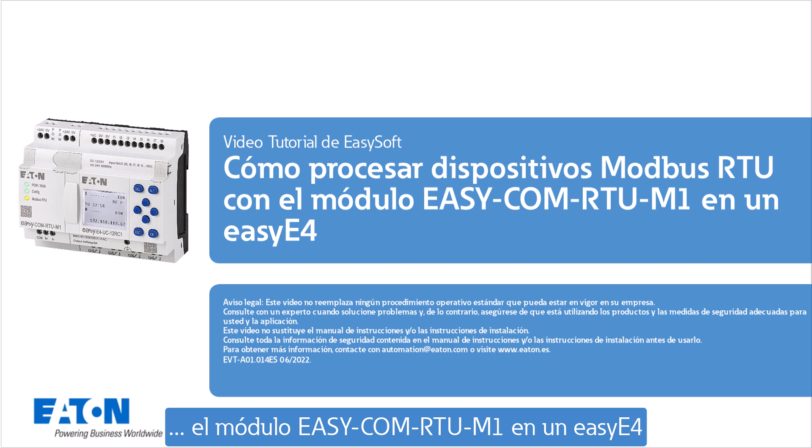Welcome to the tutorial how to process Modbus RTU devices with the EASY-COM-RTU-M1 module on an easyE4. In this example, a PowerXL DG1 frequency inverter is connected serially to the EASY-COM-RTU-M1 module.

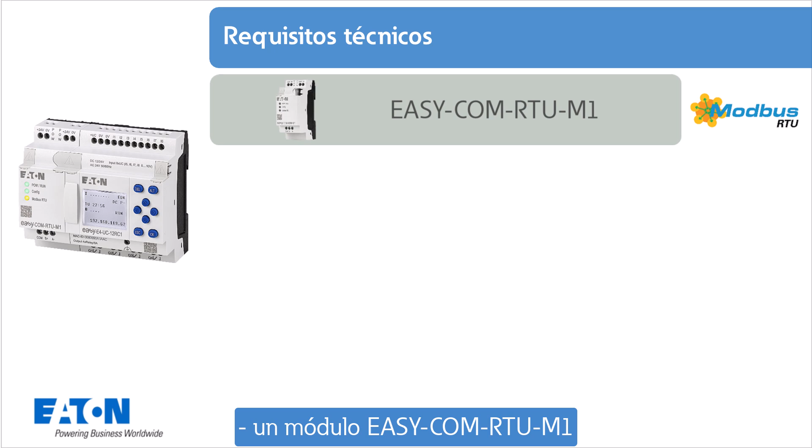The following technical requirements must be met for this: an EASY-COM-RTU-M1 module, an easyE4 basic device with firmware version greater than or equal to 1.4, including a bus connector for communication modules on the left side. A note: the bus connection plug is included in the scope of delivery of the Modbus module. The EasySoft programming software greater than or equal to version 7.4. A license is required for the EasySoft programming software.

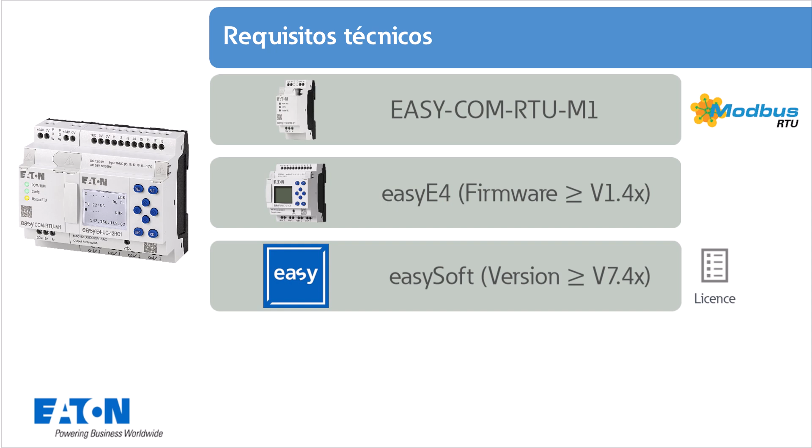Software, firmware and updates can be downloaded from www.eaton.com/software. The exemplary used PowerXL frequency inverter DG1.

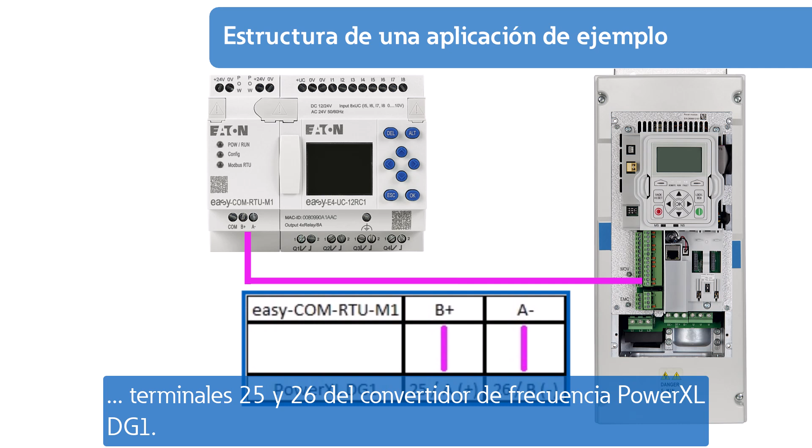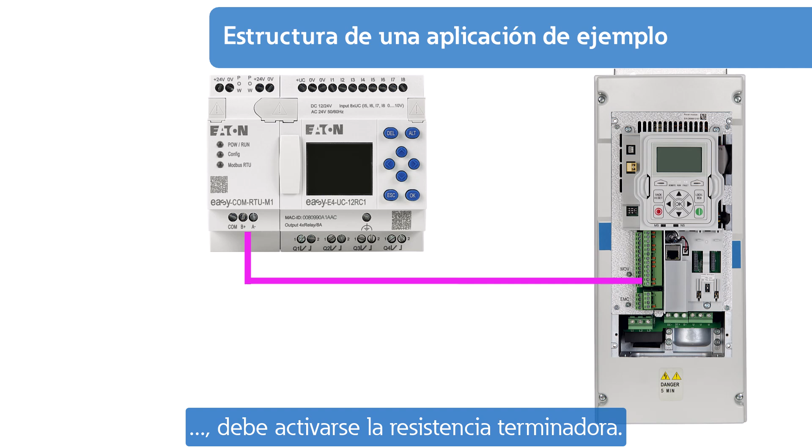What does the structure of the exemplary application look like now? The EASY-COM-RTU-M1 module is connected to the terminals 25 and 26 of the PowerXL frequency inverter DG1. If the DG1 is the last device on the Modbus network, the terminating resistor must be switched on. With the easyE4, the terminating resistor is switched on by software.

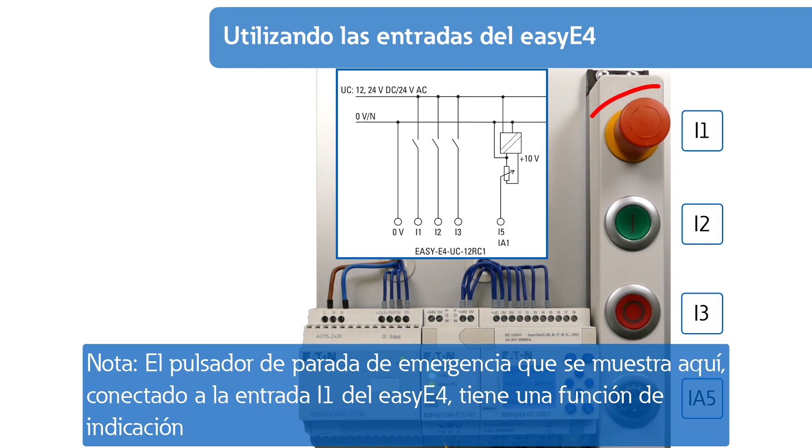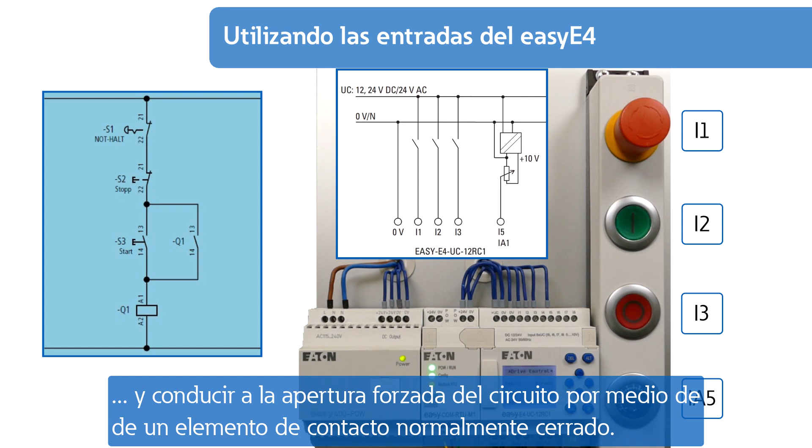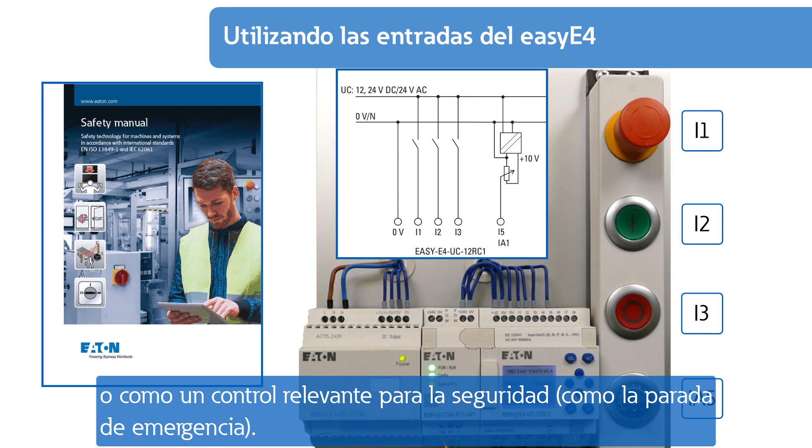A note: the emergency stop switch shown here connected to input I1 of the easyE4 has an indicating function and no safety relevant function. For safety relevant functions, emergency stop switches must operate according to the principle of forced actuation and lead to forced opening of the circuit by means of a normal closed contact element. The easyE4 must not be used to implement safety relevant functions in the sense of personal and machine protection or as a safety relevant control, such as emergency stop. More detailed instructions are given in the Eaton safety manual.

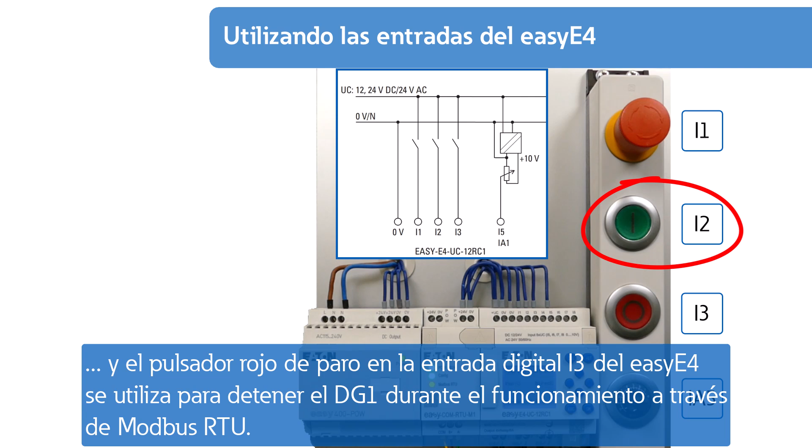In this application example, the green on button on digital input I2 of the easyE4 is used to start the DG1, and the red off button on digital input I3 of the easyE4 is used to stop the DG1 during operation via Modbus RTU. On the PowerXL DG1 variable frequency drive, both analog inputs are assigned to potentiometers. The analog moving coil measuring instrument is connected to analog output 1 and displays the actual output frequency of the DG1.

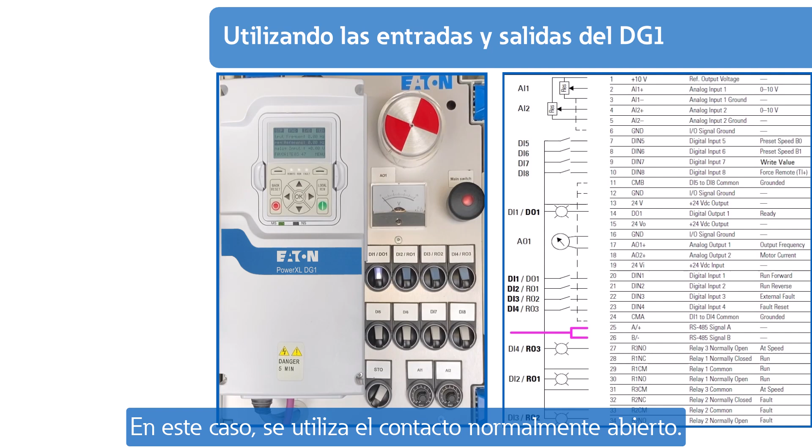The switching elements of the upper row have a double function. On the one hand, they contain the on switches for the digital inputs DI1 to DI4, shown in bold in the circuit diagram. On the other hand, the indicators for the digital output DO1 and the relays RO1, RO2 and RO3. Here the normally open contact is used in each case. The second row contains the on switches for the digital inputs DI5 to DI8. All 8 on switches have a push button function to the left and a latching function to the right.

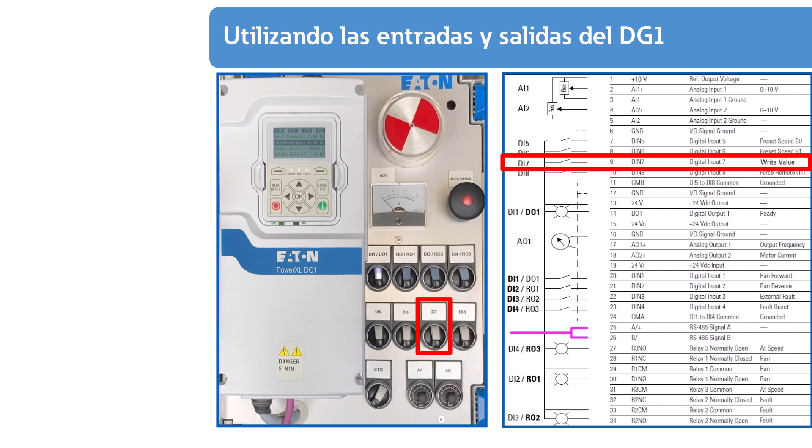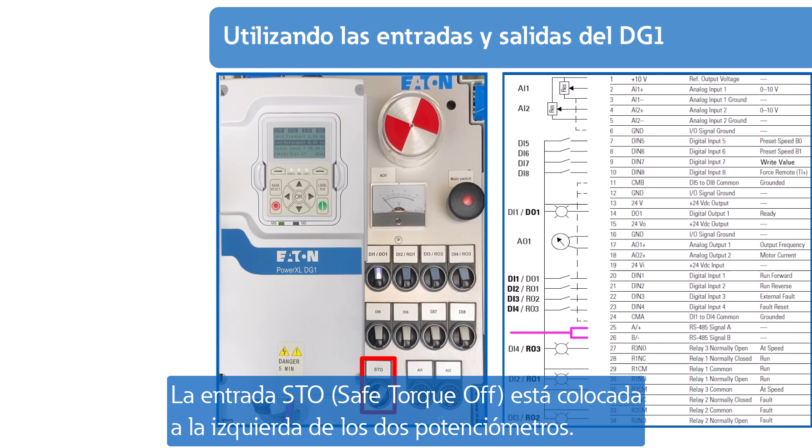Digital input DI7 is not assigned with any function by factory default. In this application example, the status of the digital input is read in via Modbus RTU and used to write an acyclic value. The STO, safe torque off input, is positioned to the left of the 2 potentiometers. In the left position of the switch, the DG1 would coast directly and output the error message safe torque off on the keypad.

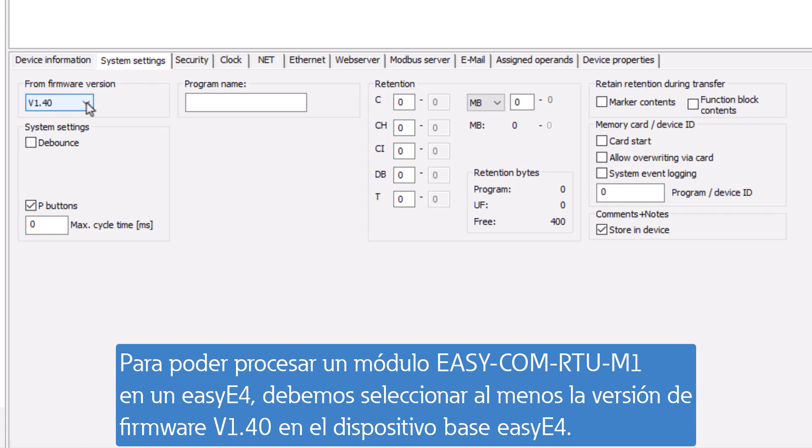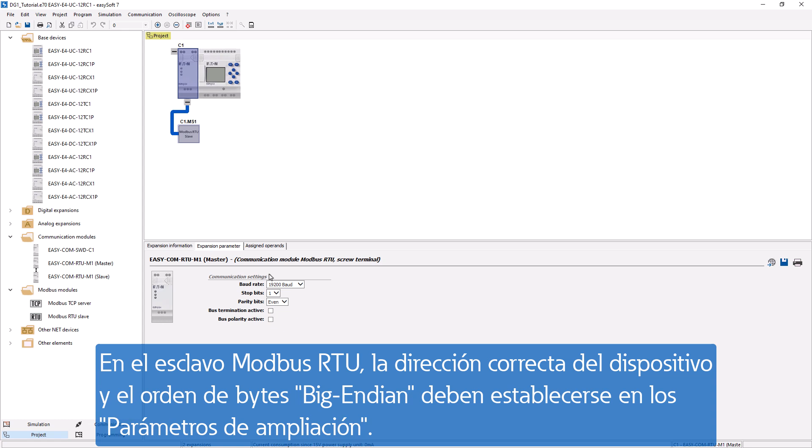To be able to process an EASY-COM-RTU-M1 module on an easyE4, at least firmware version 1.4 must be selected on the easyE4 basic device. In the expansion parameter tab of the Modbus master, the same communication settings must be made for the baud rate, the stop bits and the parity bit as for the connected devices. At the Modbus RTU slave, the correct device address and the byte order big endian have to be set at the expansion parameters.

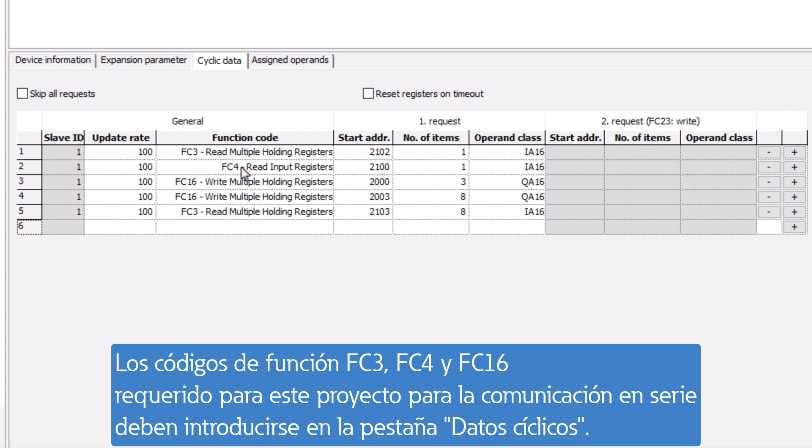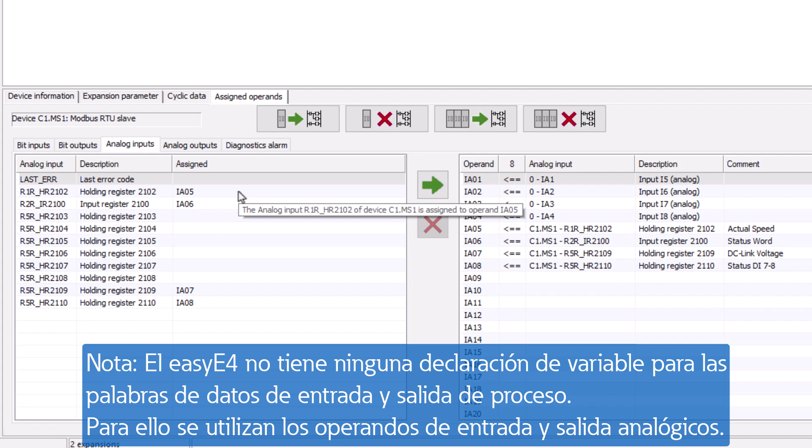The function codes FC3, FC4 and FC16 required for this project for serial communication are to be entered in the cyclic data tab. In the tab Assigned operands, the Modbus registers operands are assigned. A note: the easyE4 has no variable declaration for the process input and process output data words. The analog input and output operands are used for this.

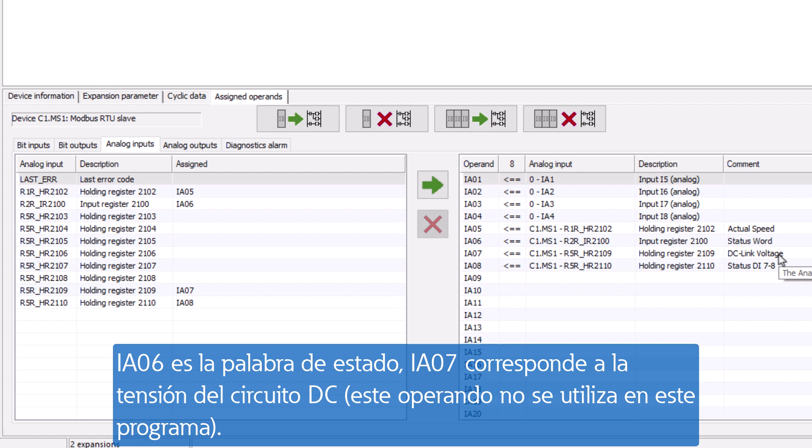As an example, in the analog input subregister, register 2102 is assigned to operand IA05, which corresponds to the actual speed of the connected drive. IA06 is the status word. IA07 corresponds to the DC link voltage. This operand is not used in this program. IA08 is used to read the status of digital inputs DI7 and DI8.

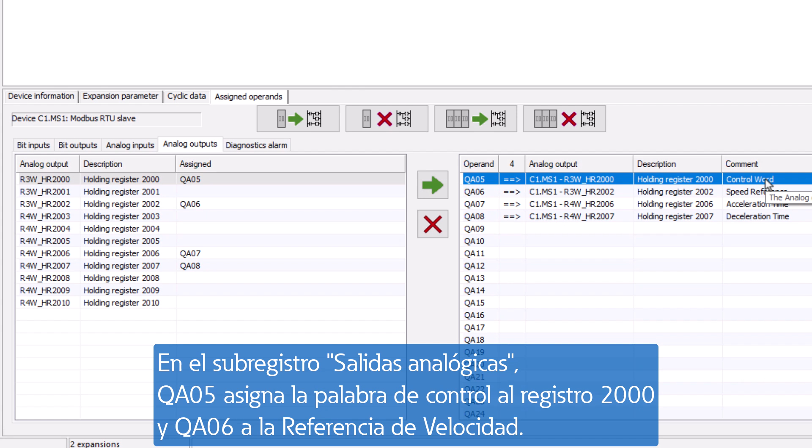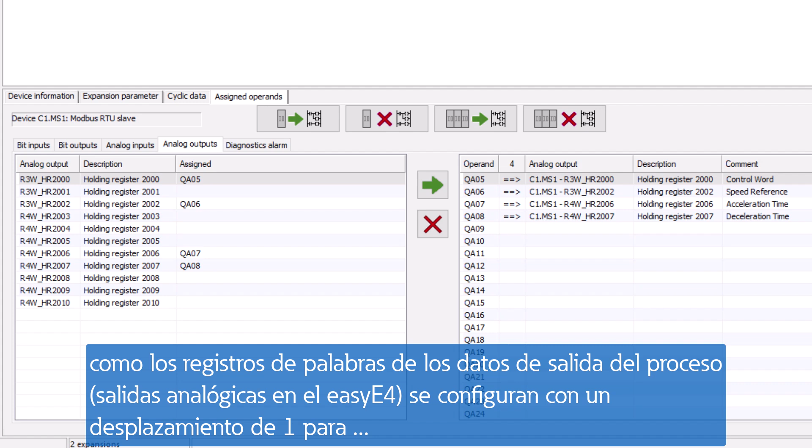In the analog output subregister, QA05 assigns the control word to register 2000 and QA06 to the speed reference. Register 2006 and 2007 are not used in this project. A note: both the process input data word registers, analog inputs on the easyE4, and the process output data word registers, analog outputs on the easyE4, are set with an offset of 1 for communication between the easyE4 and the DG1 frequency inverter. For example, the control word in the easyE4 is register 2000. In the DG1 it is register 2001.

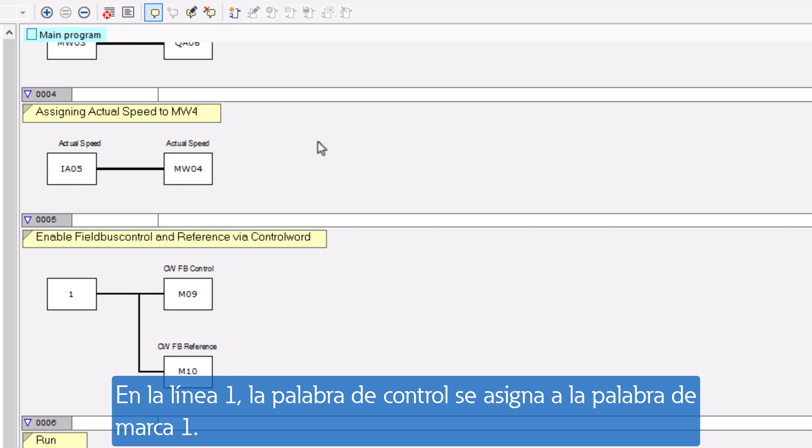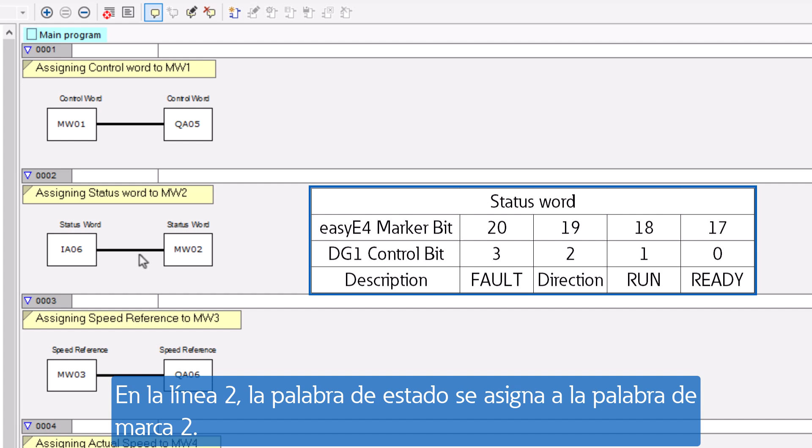The program of the easyE4 is explained below. In network 1, the control word is assigned to marker word 1. In network 2, the status word is assigned to marker word 2. In network 3, the speed reference is assigned to marker word 3. In network 4, the actual speed is assigned to marker word 4.

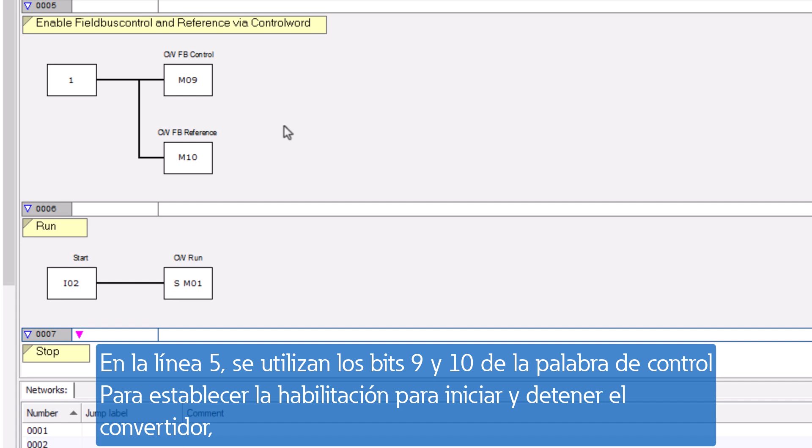In network 5, bits 9 and 10 in the control word are used to set the enable for starting and stopping the drive, as well as the setpoint setting via fieldbus. In network 6, marker bit 01 is set for the start via digital hardware input 2, which corresponds to the first bit of the control word.

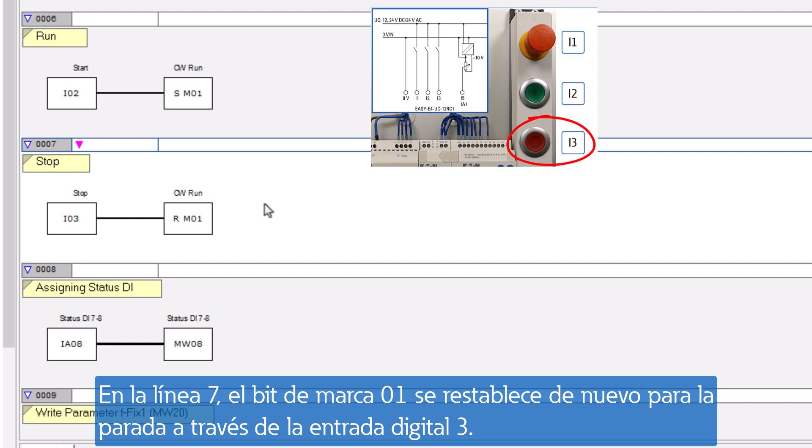In network 7, marker bit 01 is reset again for the stop via digital hardware input 3. In network 8, the status of digital inputs DI7 and DI8 is read from the drive and assigned to marker word 08.

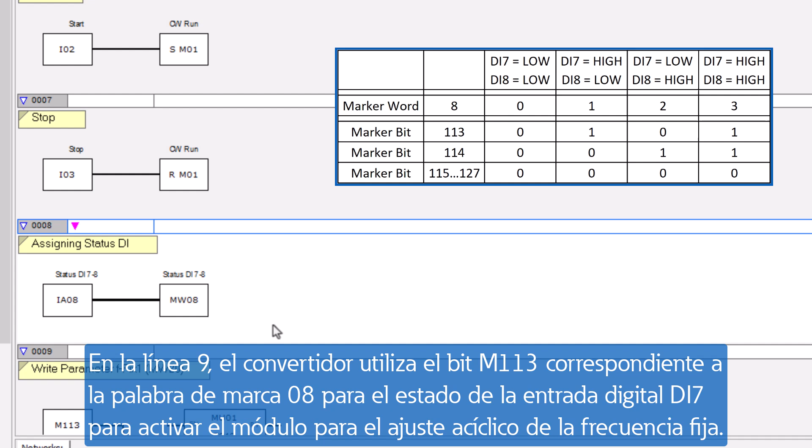In network 9, the corresponding bit marker 113 from marker word 08 for the status of digital input DI7 is used by the drive to trigger the module for an acyclic setting of the fixed frequency.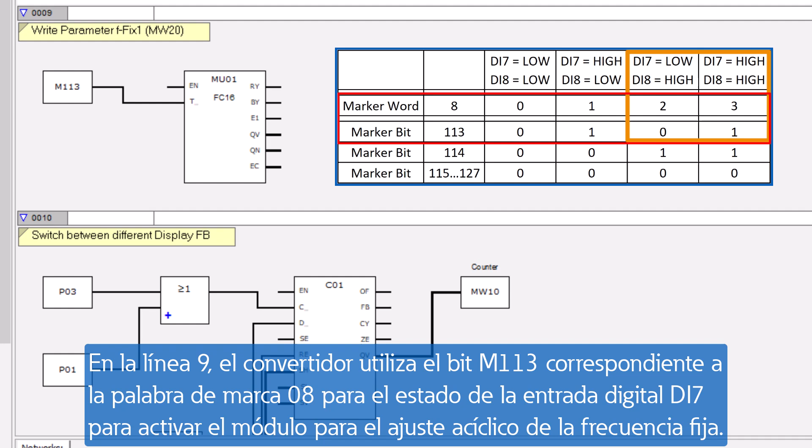In network 10, the display change between the different display modules is triggered via the right and left key P03 and P01, and temporarily stored in marker word 10.

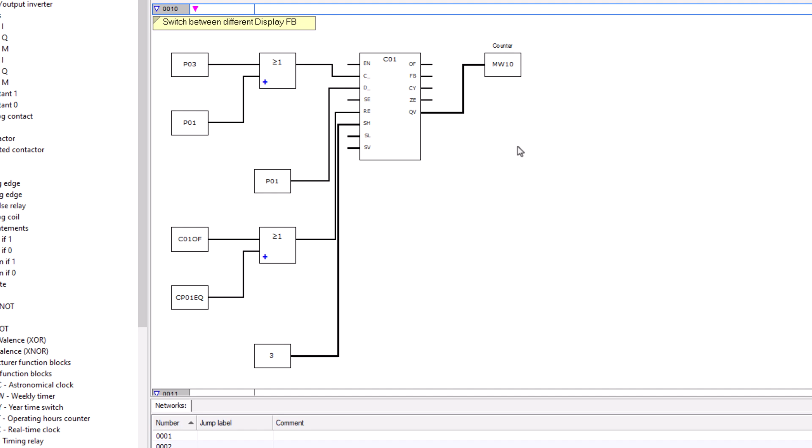In network 11, counter C01 from network 10 is reset to 0 when 65,535 is reached in marker word 10.

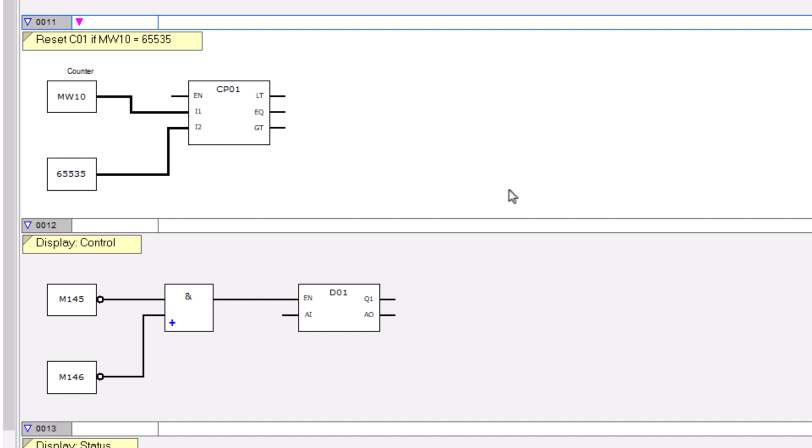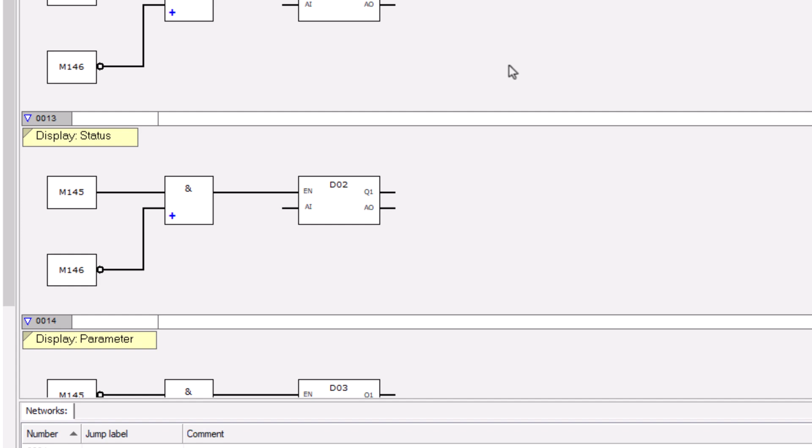In the following networks, the marker bits 145 and 146 from marker word 10 are evaluated. If marker bits 145 and 146 are false in network 12, the text display 01 is selected. If only marker 145 is true, the text display 02 is selected in network 13. If only marker 146 is true, the text display 03 is selected in network 14.

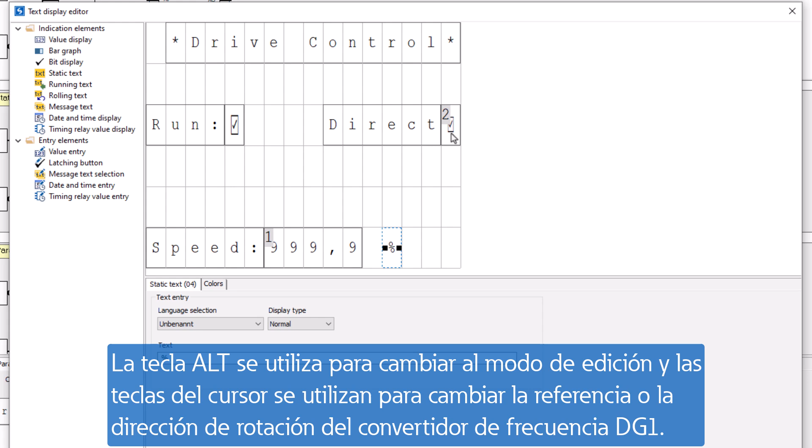The control word is displayed in text display 01. The Alt key is used to switch to input mode, and the cursor keys are used to change the reference or the direction of rotation of the DG1 frequency inverter. On the left, the DG1 is started and stopped via the run bit from the control word.

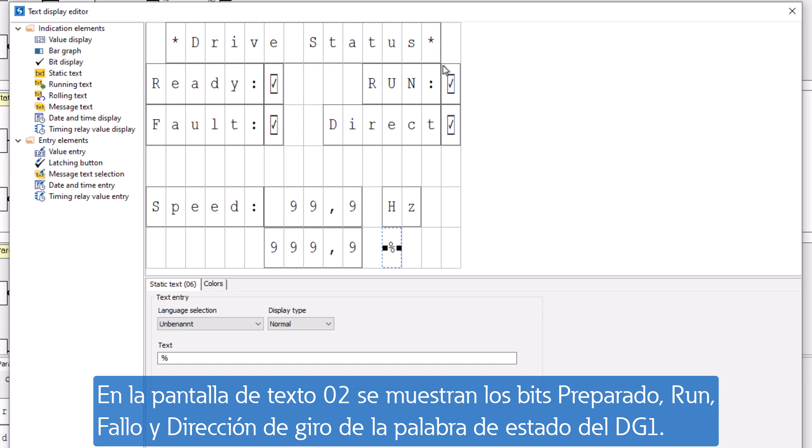In text display 02, the ready, run, fault and direction bits are displayed from the status word of the DG1. Below this, the actual output frequency is displayed in percentage and scaled in hertz.

In text display 03, the fixed frequency 1 scaled to hertz is entered via acyclic communication. This value is then written from digital input DI7 of the DG1 frequency inverter via rising edge of the read-in status.

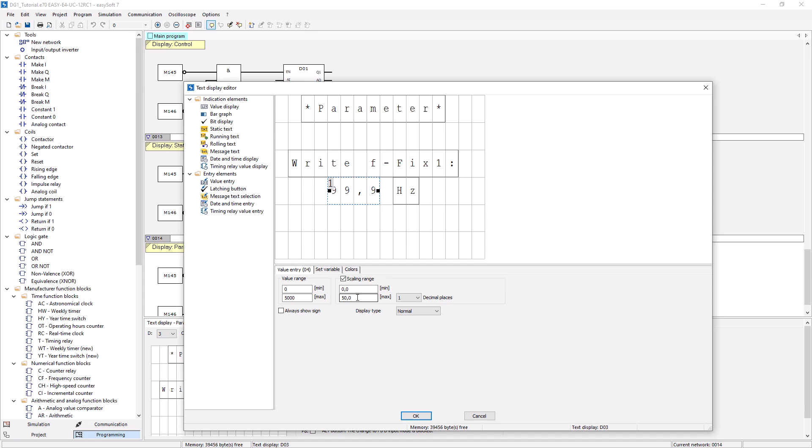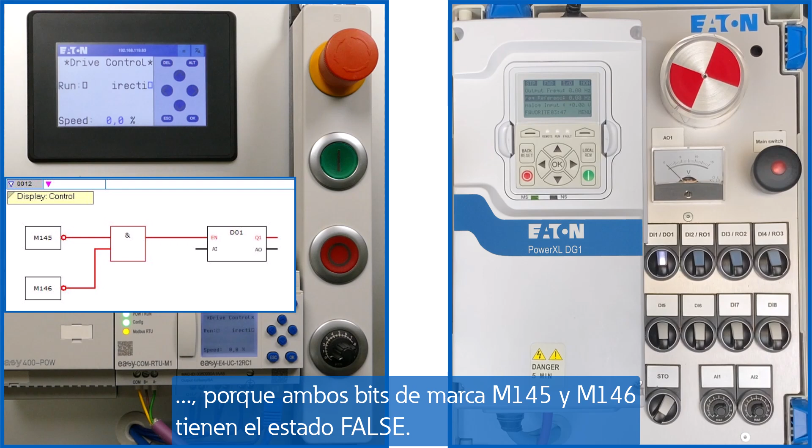Let's move on to the demonstration of the application example. On the external remote touch display EasyRTD, the text display 01 for the control word is displayed because both marker bits 145 and 146 have the state false.

On the DG1 frequency inverter, the sources for local and remote mode have been changed. In local mode, the terminal was selected as the command source instead of the keypad, and analog input AI1 was selected as the reference in order to be able to control the DG1 detached from field bus operation for maintenance work, for example. In remote mode, the field bus is the source for the control commands and for the reference.

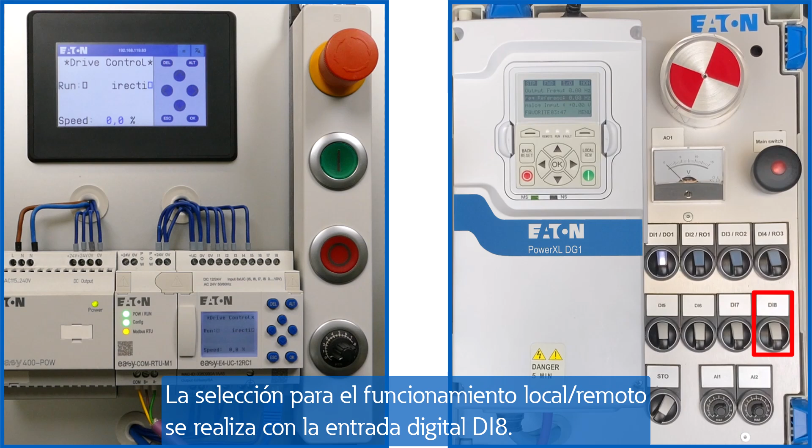The selection for local/remote operation is made with the digital input DI8. For operation of the DG1 frequency inverter via the serial Modbus RTU interface via terminal 25/26, the digital input DI8 is switched on.

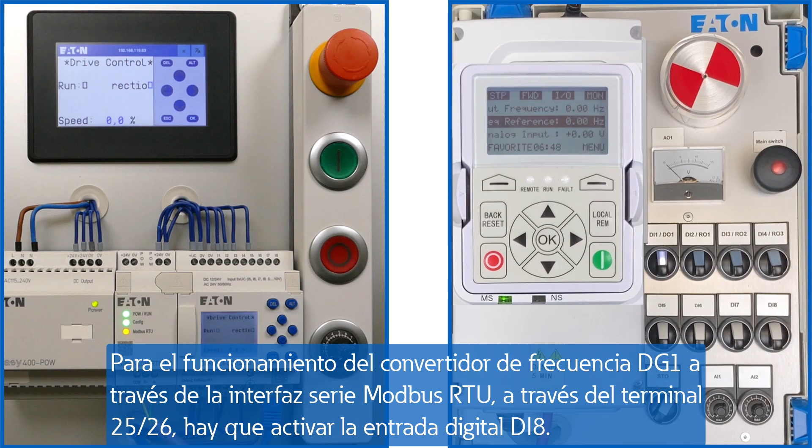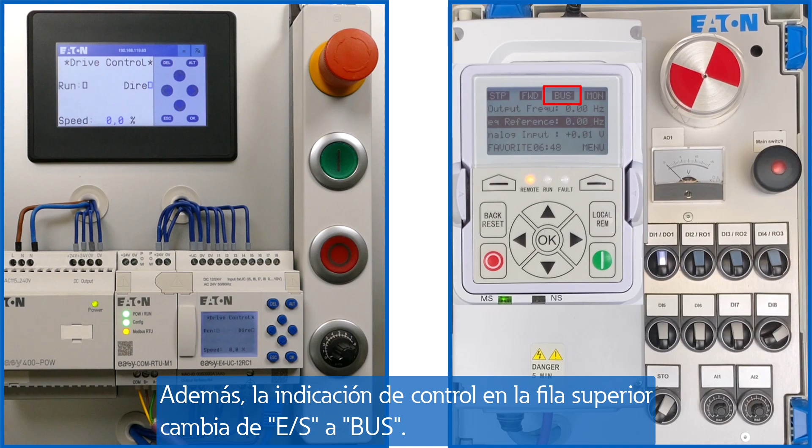This is indicated on the frequency inverter by the remote LED lightening up. In addition, the control flag in the top row changes from I/O to bus. On the external EasyRTD, the reference value is set to

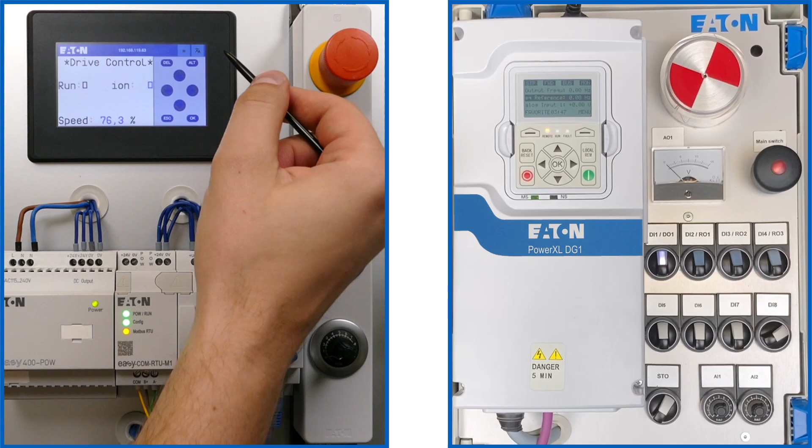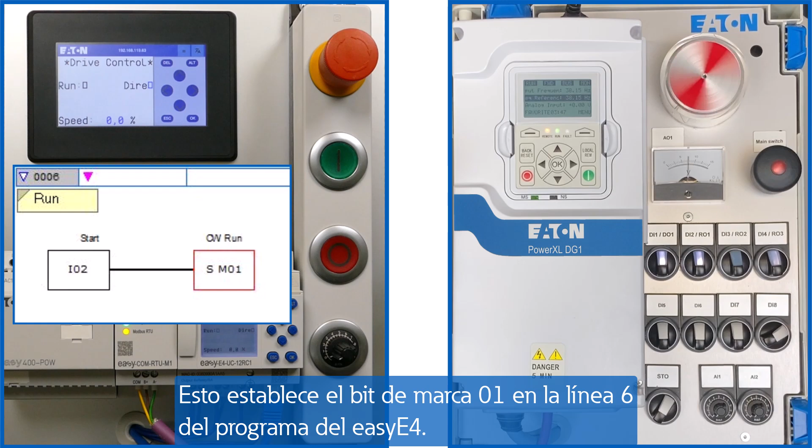76.3%. The DG1 variable frequency drive is started via the green Start button. This sets marker bit 01 in network 6 of the easyE4 program. A change is made to text display 02 for the status word via the right P key.

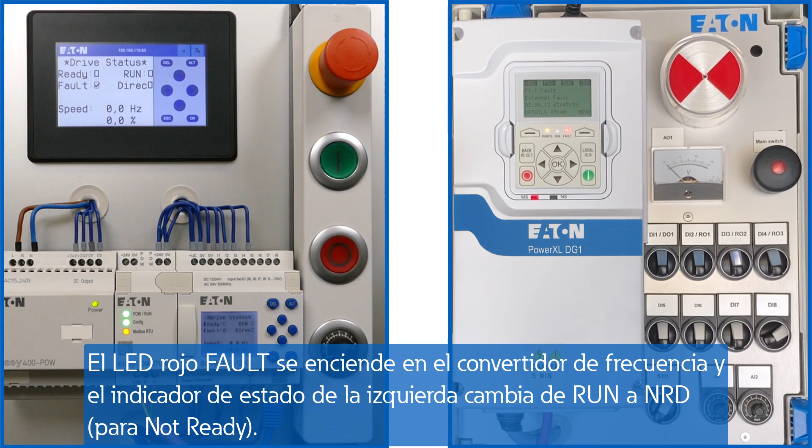An external fault is generated via digital input DI3 of the frequency inverter. The red fault LED lights up on the frequency inverter and the left status flag changes from run to NRD for not ready. The error display, external error, is flashing in plain text.

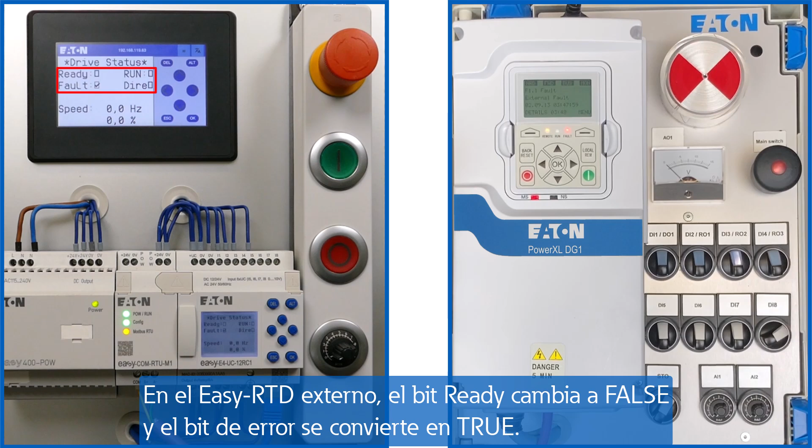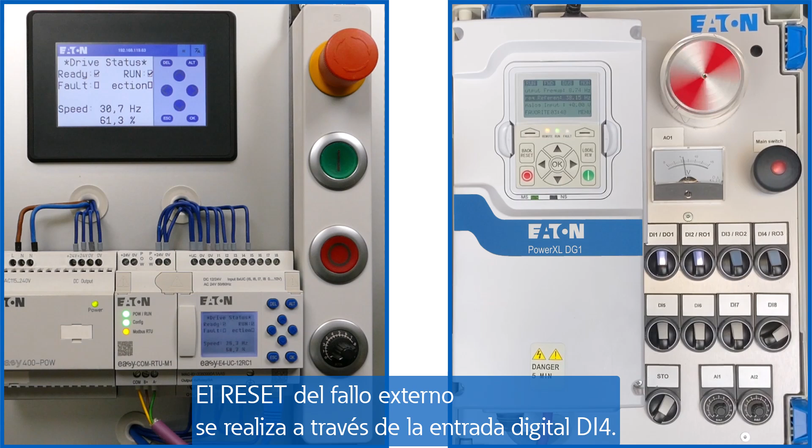On the external EasyRTD, the ready bit goes to false and the fault bit becomes true. When the output frequency reaches 0, the run bit becomes also false. The reset of the external fault takes place via the digital input DI4.

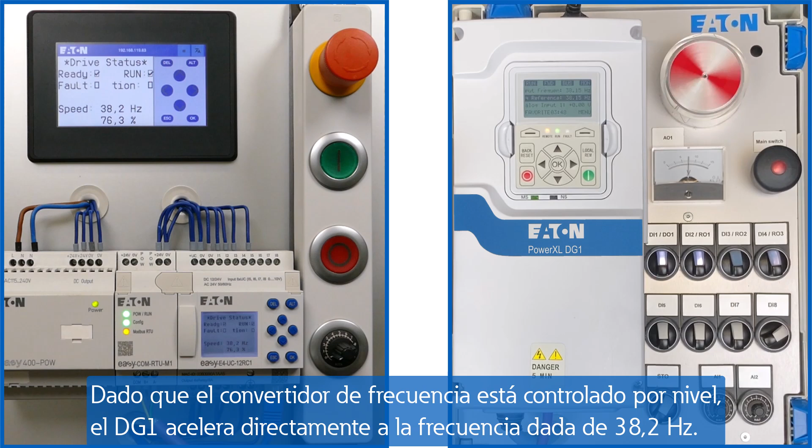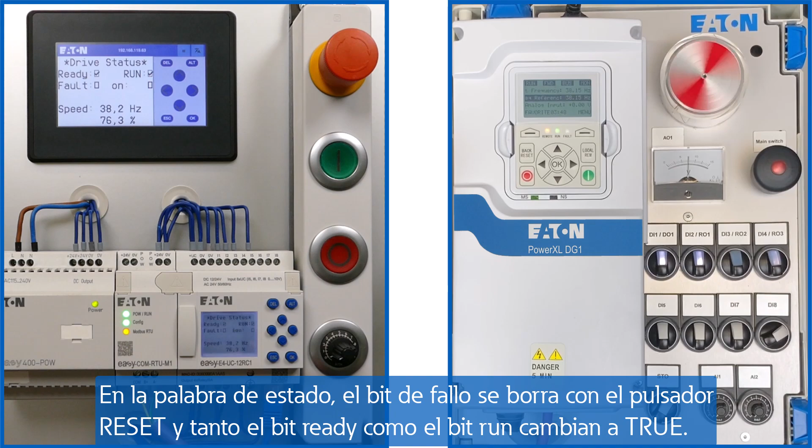Since the frequency inverter is level controlled, the DG1 accelerates directly to the given frequency of 38.2 Hz. In the status word, the fault bit is cleared with the reset and both the ready bit and the run bit are getting true.

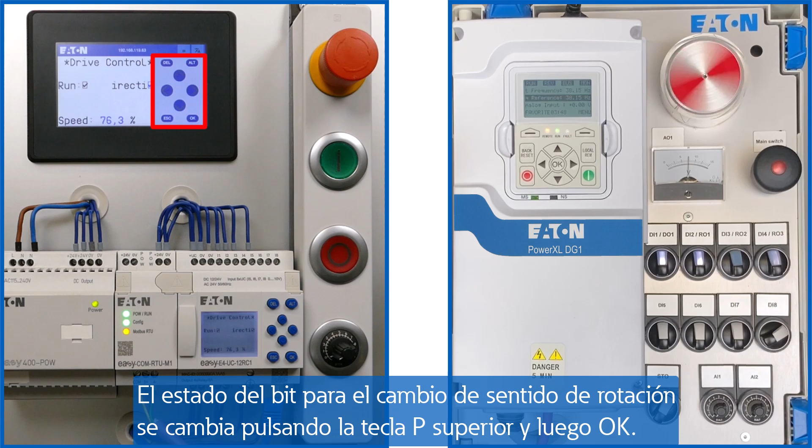The left P key is used to switch back to text display 01 for the control word. Press the Alt key and the left P key to access marker bit 02. The bit status for the change of direction of rotation is changed by pressing the upper P key and then OK. In the subsequently selected text display 02, this is indicated in marker bit 19.

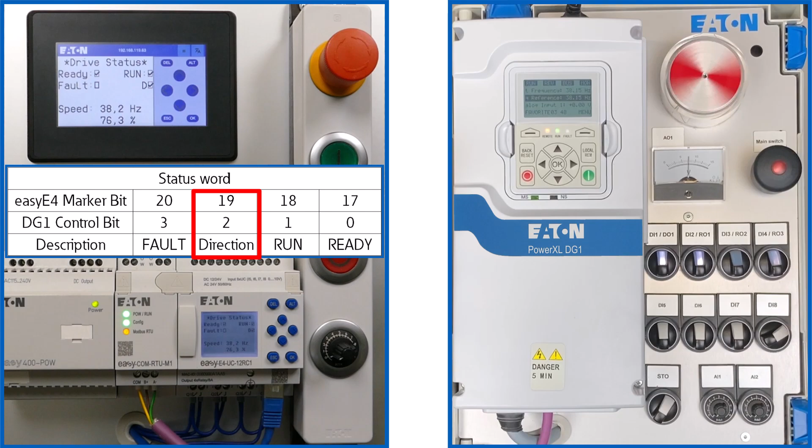Via digital input DI5, the fixed frequency 1 is pre-selected at the DG1. The DG1 now decelerates to 5 Hz.

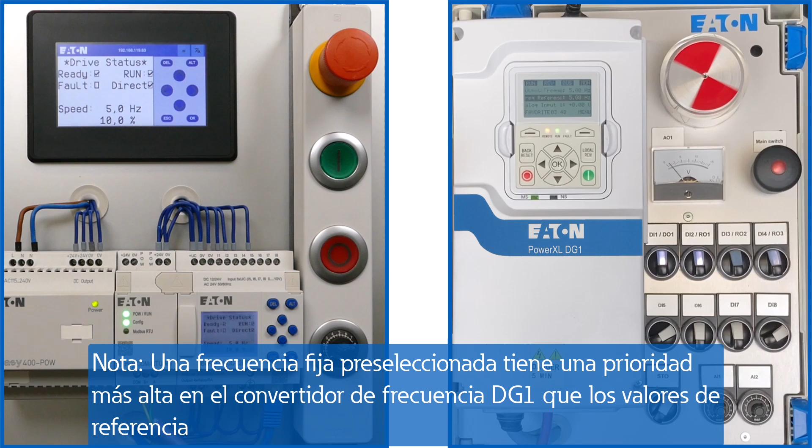A note: a pre-selected fixed frequency has a higher priority on the DG1 frequency inverter than reference values via field bus, via analog input, or for example via internal PID controller.

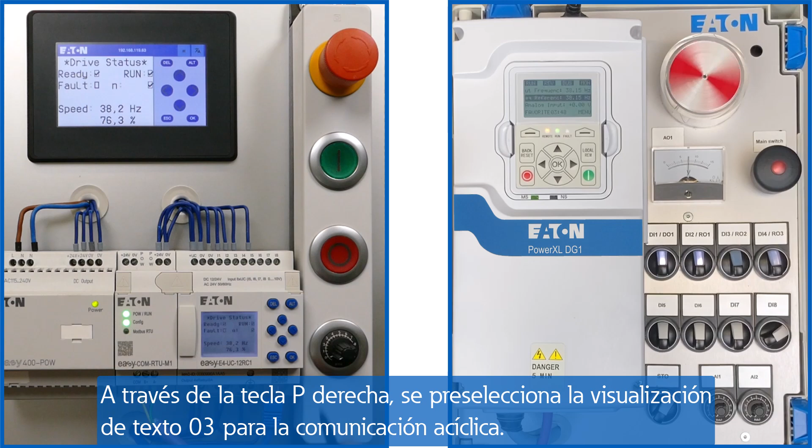With low signal at digital input DI5, the DG1 accelerates again to the reference value of 38.2 Hz given by the field bus. Via the right P key, the text display 03 is pre-selected for acyclic communication.

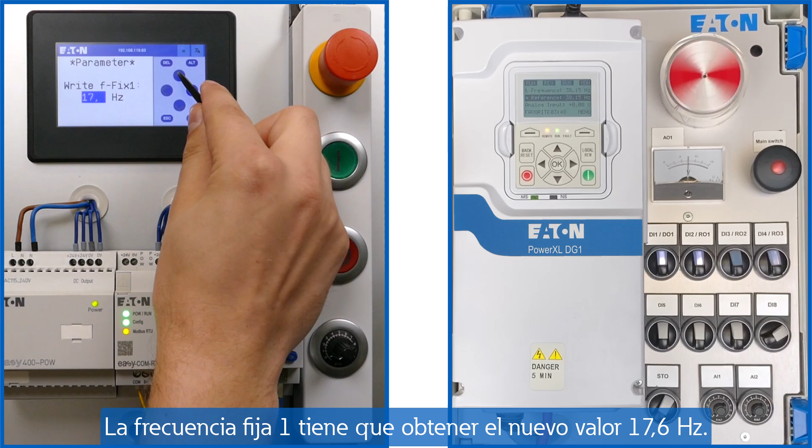The fixed frequency 1 has to get the new value 17.6 Hz. Here, digital input DI7, which is not used by DG1, is used to trigger acyclic communication via marker bit 113. The left P key is used to switch back to text display 02 for the status word.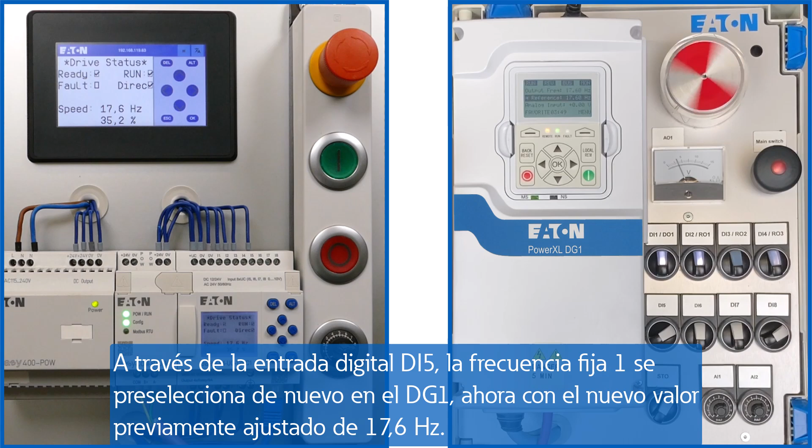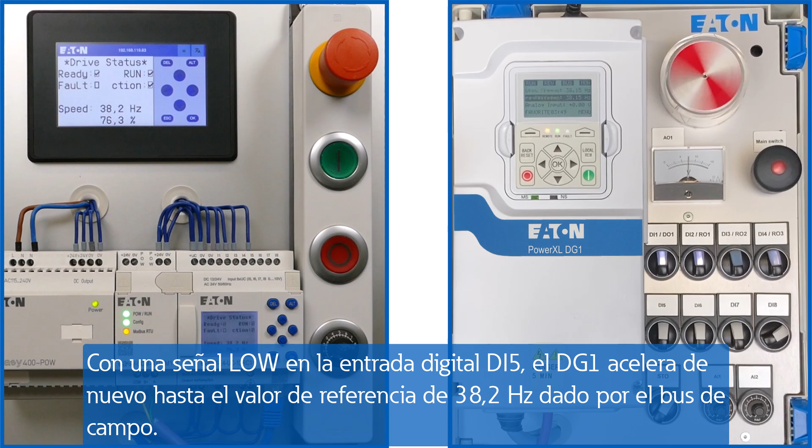Via digital input DI5, the fixed frequency 1 is pre-selected again on the DG1, now with the new previously set value of 17.6 Hz. With the low signal at digital input DI5, the DG1 accelerates again to the reference value of 38.2 Hz given by the field bus.

Pressing the Alt key and the left P key again accesses marker bit 02, which causes a renewed change in the direction of rotation.

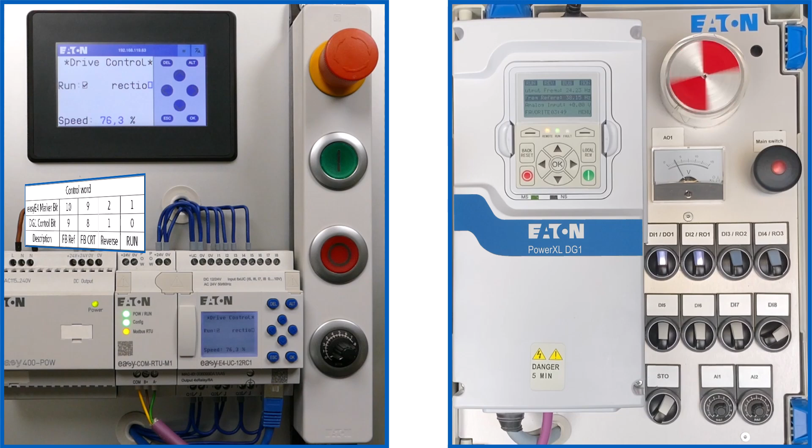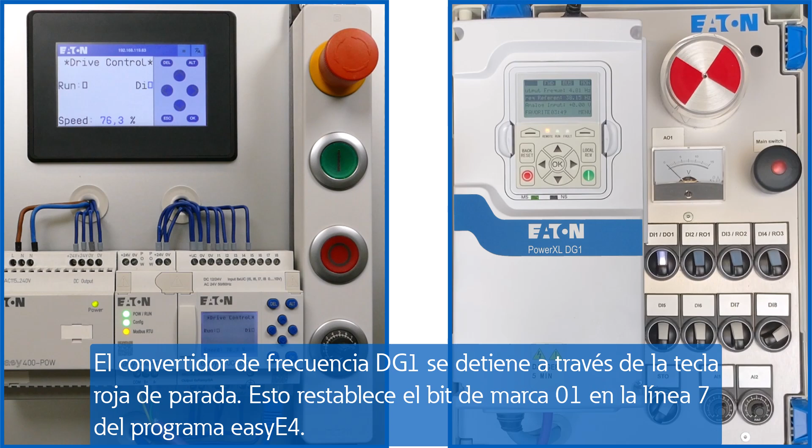The DG1 frequency inverter is stopped via the red stop key. This resets marker bit 01 in network 7 of the easyE4 program. Finally, the change from field bus operation to local operation is made by a low signal at digital input DI8.